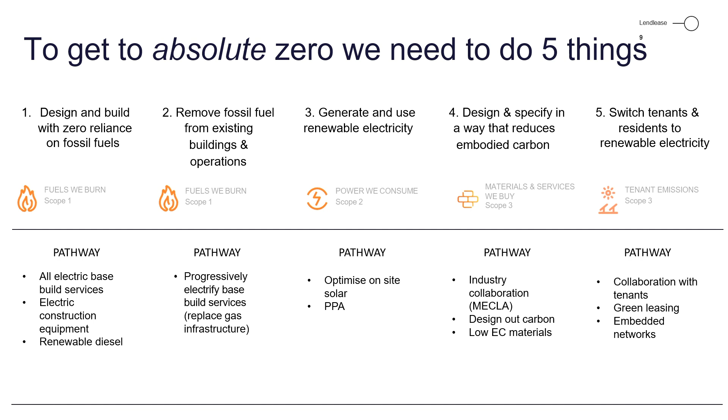Under that context, we have been looking at sort of 5 key things that we need to do to decarbonise in the context of the real estate business that we run. We've broken these up into scopes. The first 2 are around our scope 1 emissions, so think about the fuels that you burn - in the context of construction, that's fuels we burn actually on site, diggers, trucks, and so on, and then in a building, gas to heat the hot water and the cooling systems. So here we have to look for ways to design and build with zero reliance on fossil fuels. We've been experimenting with different types of electric kit.

We've been experimenting with fuel alternatives, things like renewable diesel, etc. And then the second item there is removing fossil fuel from existing buildings and operations.

So we have to go through all of our buildings that have got gas in them now and map a pathway to replace that gas with heat pumps and the like so that they can be fully electrified. And so that will apply for all our build-to-rent buildings, etc., now that we're building fully electric from day one.

So for the newer stuff coming in, we can set that pathway to decarbonisation much more easily, but we've also got to remember the existing stock, and that's a very relevant story generally in terms of circularity, because existing stock is something that we need to love and cuddle, as we'll get to later for number 4 if we're thinking circular.

Number 3 is actually the easiest on our Mission Zero journey, as we like to call it, which is the generation and use of renewable electricity. There are solutions out there. We're just about to enter a deal with a number of different PPAs in different states that will see us 100% renewably powered in the next financial year. So that one, I think, once you can figure out your data and what you need, is fairly clear.

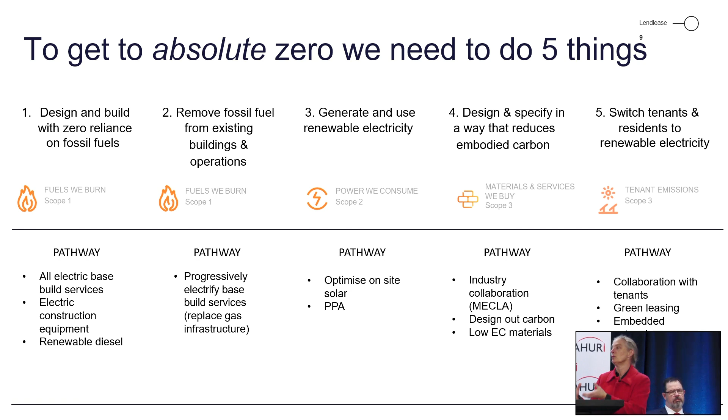And then downstream, when we've got people using our buildings, which at the moment are predominantly commercial tenants, but in the build-to-rent context will start to be residential tenants, then we need to be encouraging them to be using and purchasing renewable electricity and being as efficient as possible. So let's deep dive into this one in the context of circularity for you guys.

So I just thought it'd be useful to talk a little bit about why embodied carbon matters in the built form. There's been lots of conversation around the amount of electricity buildings consume, the amount of energy, the emissions associated with that. That's been a very large story, and it accounts for an enormous proportion of the world's emissions. So you might say, well, shouldn't we try and solve that first? Isn't efficiency and renewables the whole story? And it is a very big part of the story, but it's not the whole story.

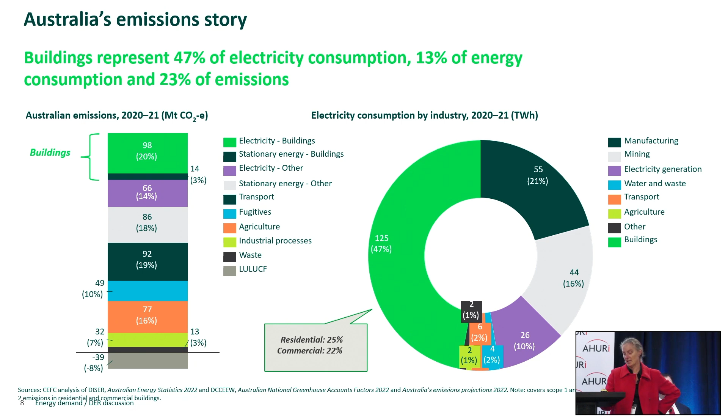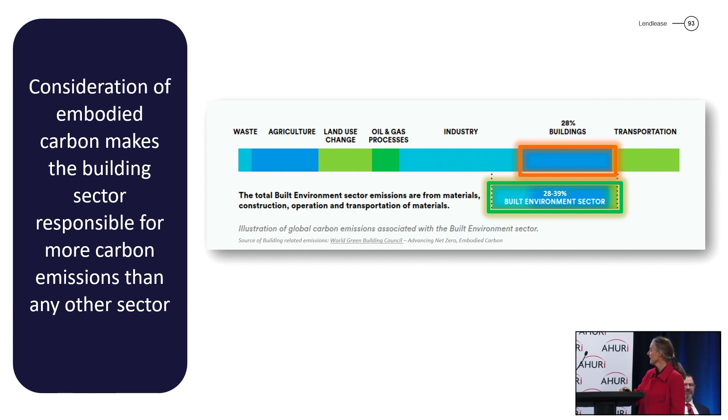All right, so in terms of the work that we do, let's give you a sense of the kinds of things we have to think about if we're going to lean into that embodied carbon space.

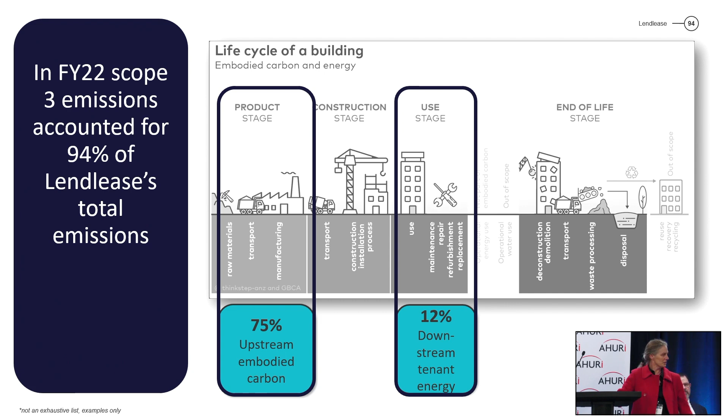For us, building is actually part of our Scope 1 because we are a builder. For other people, that may not be the case. And downstream, there we are in the usage phase. So that all looks very simple, like, hey, just change your materials. Well, let's have a little look at what they are.

We've been working heavily with an organisation called MECLA—we're one of the early founders of it, the Material Embodied Carbon Leaders Alliance—coming together with suppliers. Many of my friends from MECLA are here on the platform with me: suppliers, designers, consultants, clients, etc. Everybody coming together to work out how we can resolve this.

There are probably four key challenges we face when it comes to building materials and reducing their carbon footprint. The first is the most basic: the ask has been inconsistent. We've had certain government departments or agencies asking for reduction in embodied carbon and others not asking for anything, similarly in the private sector. From a supplier's perspective, that's mixed signals—is there any reason for them to retool, to innovate? Is this real or is this inconsistent? So with MECLA we've been trying to make sure everybody is asking for a reduction in embodied carbon all the time. If any of you are in the space of asking for housing, embodied carbon reduction should be core and central to your ask.

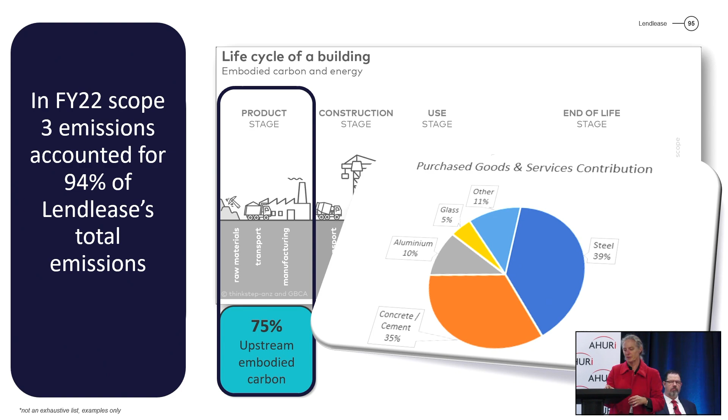So that's the materials front, but even more relevant for this context around circularity is the design space. Another opportunity to reduce embodied carbon is to look at the world of design. The first question for design is, do you need a new building at all, or can you repurpose an old one? You'll see why I say that when you look at some slides I've borrowed from friends at Atelier 10.

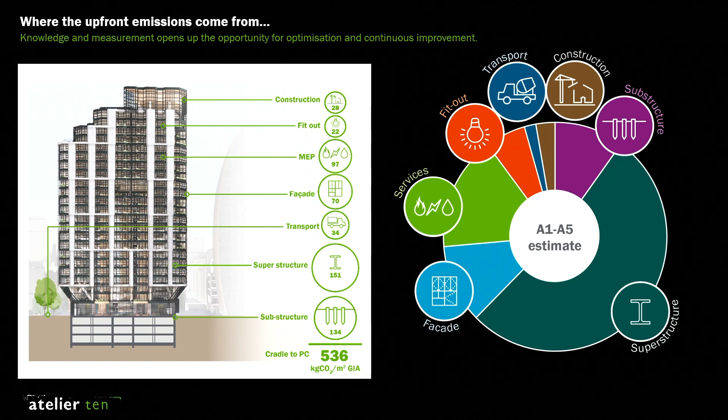They've given us a few clues on things we can do and avoid, and a lot of them are not that popular. If you look at the superstructure, the first dot point is a smaller grid—meaning a smaller column grid, i.e.

More columns—that might sound counterintuitive, but if you've got a big span, you've got to have some hulking transfer beam that sits on top of it. So there's actually less concrete overall if we've got more columns.

We've been on a journey in the last decade saying floors need to be big, expansive and open. But in the residential context, there's lots of opportunity to lean into more columns because there are lots of walls in homes and houses. This is probably more of a challenge in the commercial context.

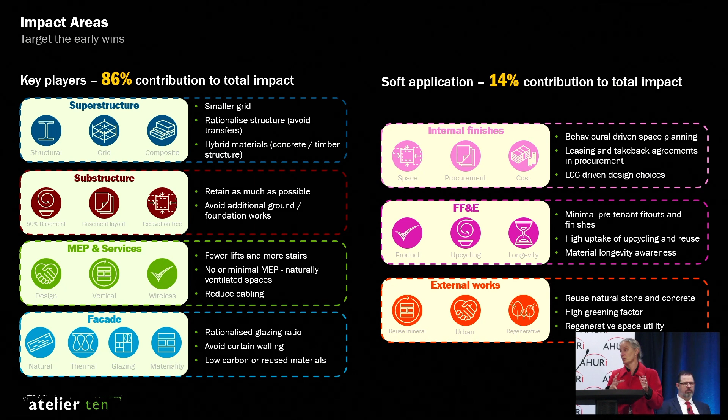There are other things too, like retaining as much as possible. If we can keep a structure and strip it out—there's lots of talk at the moment about repurposing commercial buildings that are underutilised or old, gas-powered, etc. Can you electrify them? Can you turn them into new commercial space or new housing, keeping the structure? That will go a huge way to reducing embodied carbon, and that's the ultimate in circularity, extending the life of a product.

Things like fewer lifts, more stairs, making your services simpler, etc. But I thought I'd pull out a few examples that I found particularly interesting when we started to look into this. So this is the column one.

The one on the bottom actually has a 20% saving in embodied carbon when you put in those small columns. They've shown a Frank Lloyd Wright version of columns to prove it can be sexy and have lots of columns in a space—that's in Wisconsin, which goes back to my architectural roots. I remember at uni salivating over things like that.

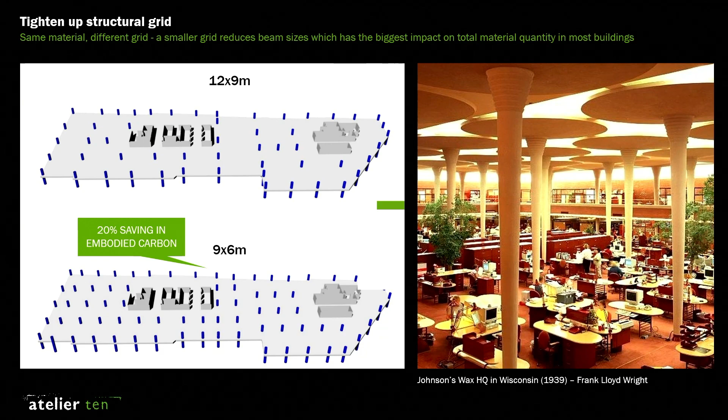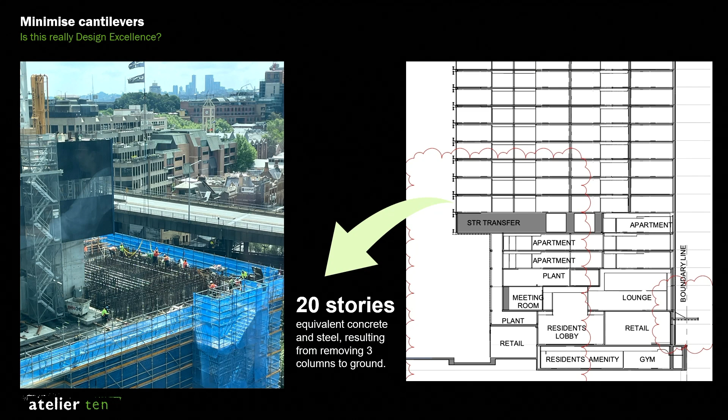Here's another example: a building in Sydney where the council was particularly keen on sight lines—they wanted to keep that space open, so they said, can you cantilever, can you hang out, similar to the Singapore thing. Where it says STR transfer, to achieve that cantilever they've had to put all the steel reinforcement in—as much steel and concrete as there would be in 20 floors, into one, just to hang that over.

When I studied architecture, cantilevers were in the good bucket—whoa, that's cool, that's great. We are going to have to relearn what's cool and what's great. That is ludicrous, and I reckon if we'd gone back to council at that point and said, do you realise what's required for those sight lines, perhaps a different decision might have been made. This is the challenge of our time: a lot of things we thought we knew, we're getting better at, we're learning and understanding, and we have to unlearn some of the habits we had in the past.

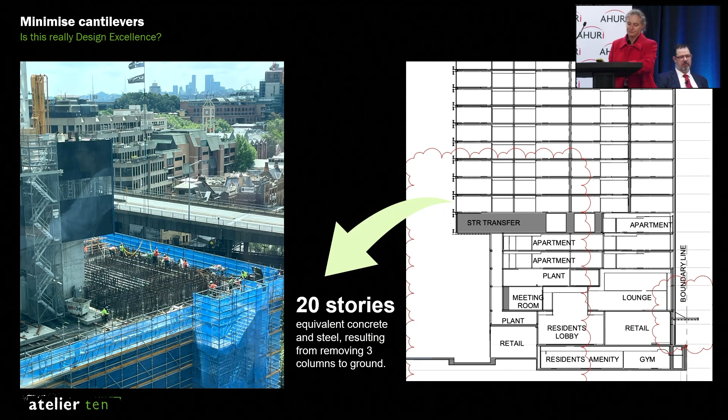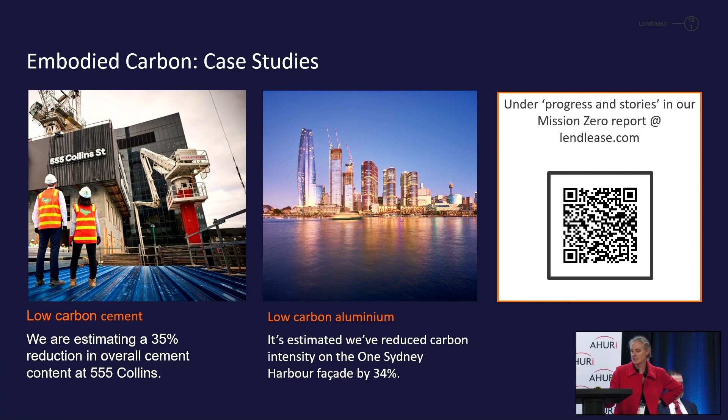If you want to learn about some of the things we've been doing, you can use the QR code—we've got a little report that talks to stories where we've made really good gains in things like cement and aluminium. There are advances, and most suppliers are really leaning into this. These are all the people on the MECLA table with us as well, so if you're not in that tent, I highly recommend it.

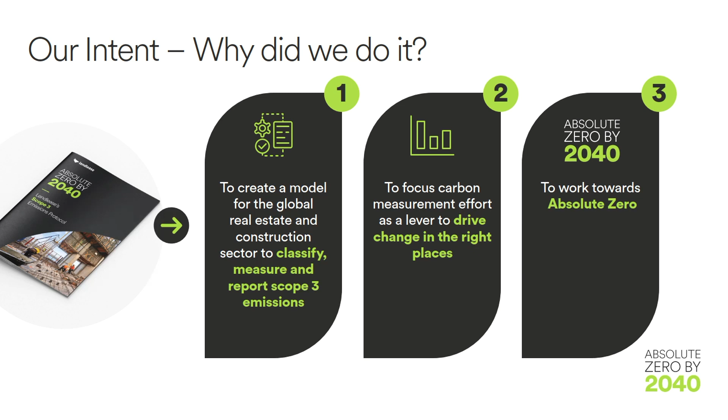Just the last thing I wanted to touch on—one of the other challenges we've had, as anyone who's played in this space knows, is that embodied carbon and scope 3 generally are very vague terms. In the greenhouse gas protocol they're not very well defined, deliberately, because everybody's scope 3 is a little different, so it has to be contextualised. We're worried about there being 20 different versions of defining this in the market, so we've dropped a little gift into the industry to start the conversation around having a more consistent way of considering embodied carbon in the context of our work.

We call it our Scope 3 protocol. We did this torturous process where some people in our team looked at 22 different company guidelines related to the greenhouse gas protocol, and we looked at 68 different disclosures, and then there are a bunch of subcategories. We went through and worked out which ones we think are relevant for our sector, and we've suggested here's what you could be and should be considering within your boundary.

And we have made that free. It's on our website. We want people to use it. We want people to tell us what they think is right or wrong about it so that we can collectively come to something that we can all use and establish. And so these are the sorts of things that we have to report underneath that. So there's a little bit of a start off to the conversation. Thank you.

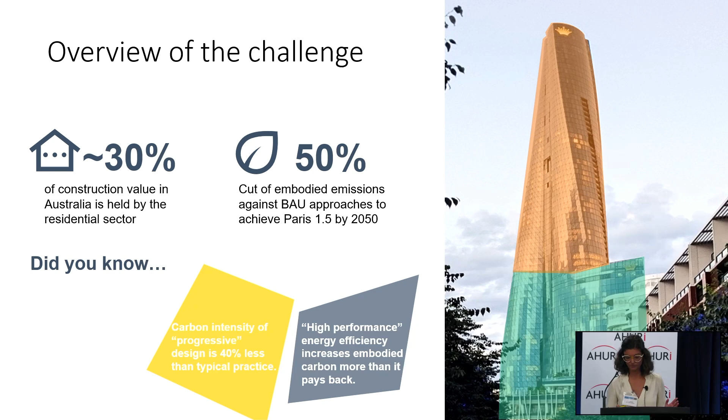All right, so if we follow the Paris Agreement, for every single project, master plan, or residential development that you have, we need to build the same things with the same specification, but by reducing embodied carbon emission by half. So it is a very big challenge.

So when we look at the upfront carbon emission for dwellings, the first chart, the one on the right—sorry, I'm not great with right and left—the smallest one, it is for Class 1A, so this would be for detached homes. And the chart is in kilograms of CO2 per NFA, so it is per area ratio.

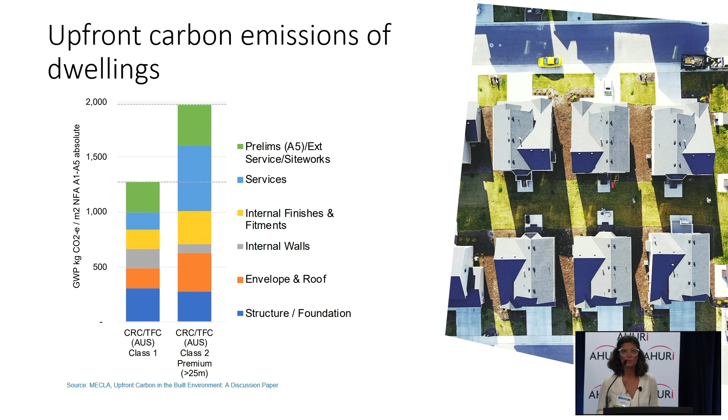So it is smaller for homes than for apartments, but we need to keep in mind the main reason is because there is a lot more foundation, underground car park, and so on in apartment buildings, and structural elements. But we need to be mindful as well that apartments tend to be a bit smaller than homes, so it does balance up the carbon emission between the two types of dwellings.

The specificity of homes is that there is a lot of stuff in a home. It's not like we deliver a cold shell apartment building or office building, where a lot of the emissions are in the structure and the facade. For homes, there is a wide diversity of emissions.

If you look at the envelope plus the structure, it's only 40%. Then all the stuff inside is another 35%. So it is important to start looking at homes. It's possible to start with the structure and facade because it's what people are most familiar with, and there's less material involved in terms of number of elements. But keep in mind there is also a lot of emission from what's inside, including the building services.

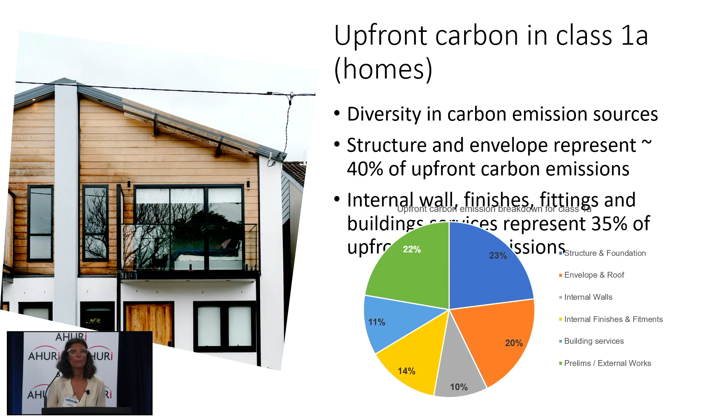It's a bit similar for apartments, but as we can see, the structure and facade is much bigger, and the internal walls will be a bit smaller.

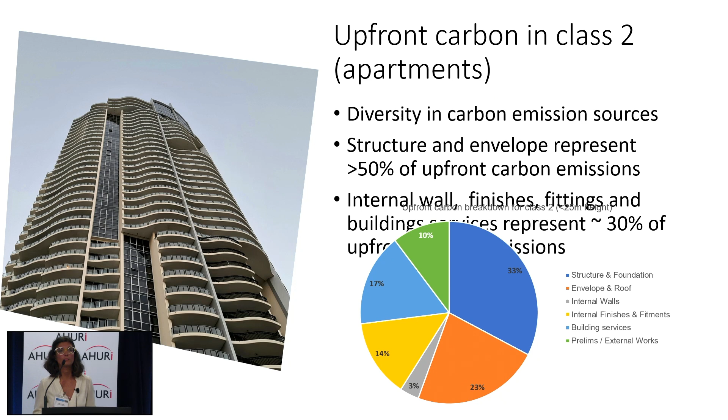So I did some rough estimation based on the footprint benchmark for homes and apartments, and given that we have about 200,000 new dwellings built each year, that comes up to about 28 million tons of CO2 per year just for upfront embodied carbon in residential. To put it into perspective, that's about 6.5 million cars driven per year, 4 million homes' energy use for one year, and also 1 billion in ACCUs. So it would be very expensive to offset.

I tried to look at how big the forest would need to be as well, but I got a bit into a rabbit hole.

Just to highlight as well, on townhomes, for example, the upfront embodied carbon is 25% of carbon emissions across the life cycle of the home. And as homes become more energy efficient, and more importantly, as the grid decarbonizes, this portion is becoming bigger and bigger, and it will become bigger quickly. So it's a very meaningful and topical element that needs to be addressed alongside other building typologies.

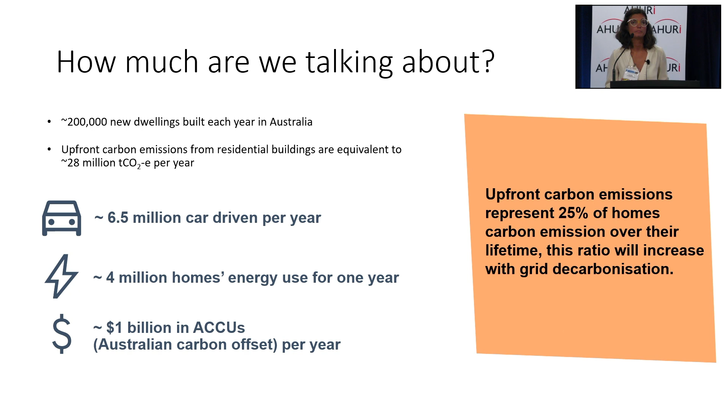So why are we not doing more about it at the moment? What are the challenges that the industry is facing?

The first one is measuring. There are different reasons why measuring can be challenging. This is a chart that was produced by MECLA. There are different benchmarks that exist, and each of them has a slightly different coverage and metrics that they use, which make them really hard to compare.

It doesn't need to stop you from measuring embodied carbon. I think what's important is that you start with a methodology and clearly acknowledge what is included, what isn't, and the level of coverage. Then you can either choose to add more over time or just make sure that whatever you're comparing with remains consistent.

The second one is that in the residential sector, especially for homes and low-density dwellings, there may not be a lot of data available to do a life cycle assessment and measure embodied carbon. A bill of quantity or a cost plan may not be as detailed or available, and that will definitely create some challenges to measure embodied carbon, but also to assess any reductions that a project wants to do in terms of circular economy or other initiatives.

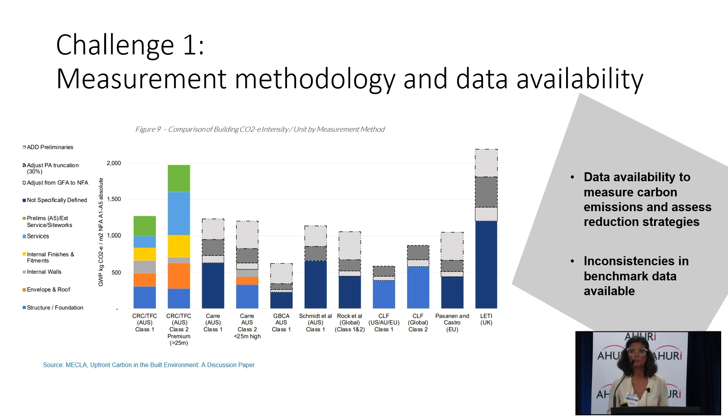That shouldn't stop you either. But I think it's important to acknowledge it and be able to extract information from what is available. It's possible to extract quantities, for example, from drawings or things like that. The next one, and George touched on it this morning as well, Rohit touched on it this morning as well,

is that residential buildings are a bit missed from a lot of the frameworks that already exist around sustainability, circularity, and embodied carbon. For example, Green Building Council Australia, which has been really leading sustainability for buildings in this country, would cover apartments with Green Star building, but it's not widely used for apartments.

And for homes, the Green Star Home scheme doesn't include embodied carbon at the moment. There might be some changes with Green Star Communities coming up and incorporating it, but similarly, it's not widely used and it's only on master plan projects.

NABERS embodied carbon, which is going to be an amazing tool used by planners as well to drive the measurement and reduction of embodied carbon on other types of asset classes, will not cover residential. And then recently, BASIX in New South Wales with the new SEPP has released a material index. So this is the first one that is really starting to address embodied carbon.

It only looks at a portion of the building elements, including the envelope and structure, but it's a bit limited in the interior elements. Still, it's a really good way to start measuring and collecting data, and also to educate people in the industry on embodied carbon. So I'm hoping other states will follow up as well.

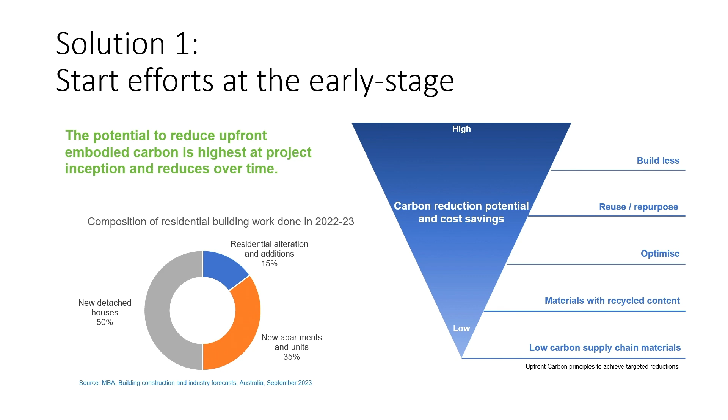So what can we do about it? The first thing, highlighted before, is that it's critical to look at this at an early stage, even if there's a limitation in the data available at the time. It's about planning how we can build less in the first place, how we can better use or repurpose existing buildings or refurbishment, or how we can make better use of existing space. That can only be done very early on.

If you arrive at the end of the project and it's just about switching normal Portland cement concrete for green concrete, you wouldn't be able to achieve as much reduction. Keep in mind we need to achieve 40% by 2030, and we're already in 2024. So given the scale of the challenge, we really need to start looking at it at an early stage.

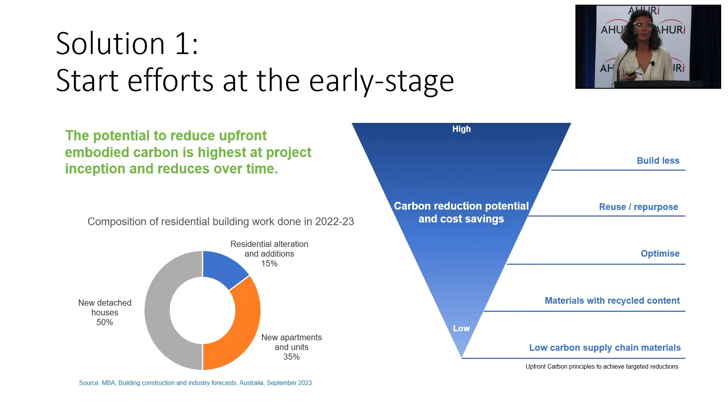Next is following the circular economy hierarchy and using some of the strategies already mentioned, such as building smaller homes. It's probably not the most popular option, but it's very efficient, and it also reduces the cost of construction.

Providing flexibility in the space to allow for upsizing or downsizing, making it easier for people to downsize when they don't need such a big home. Also refurbishment of existing dwellings -- since the envelope and structure account for about 50%, you can easily save 50% by doing a refurbishment.

Reuse of existing material, creating shared space -- this is more common in apartments, although it's been lost a bit. Can we have shared space to cater for when we invite people over, so we don't need such a big apartment? Can we have a shared garden? Can we have a shared laundry? That one's a bit more tricky, but do we all need a laundry room?

And finally, we can also look at material passports. It would be quite cool if we could get a digital version of our home with a drawing, that would tell us what's been used for the tile in my kitchen, so if I have a crack, I can actually replace it instead of redoing the whole thing. Same for the paint -- always good to know which color you have. That would also give you a stronger sense of ownership, because you actually know what you own.

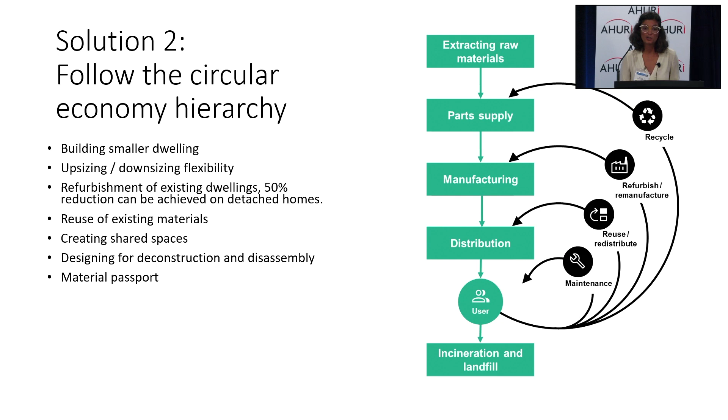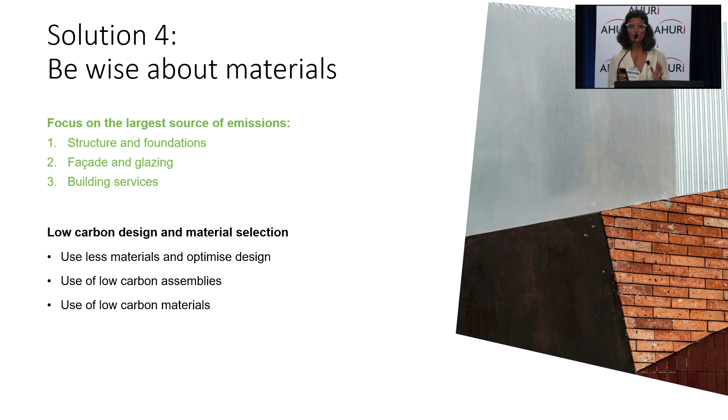And finally, the last step, which is the one most commonly addressed at the moment, is changing materials. So looking at the biggest sources of emissions -- structure, foundation, facade glazing, building services -- and looking at how we can, through efficient design, use less, use low carbon assemblies, changing the type of buildup we have, or use low carbon materials.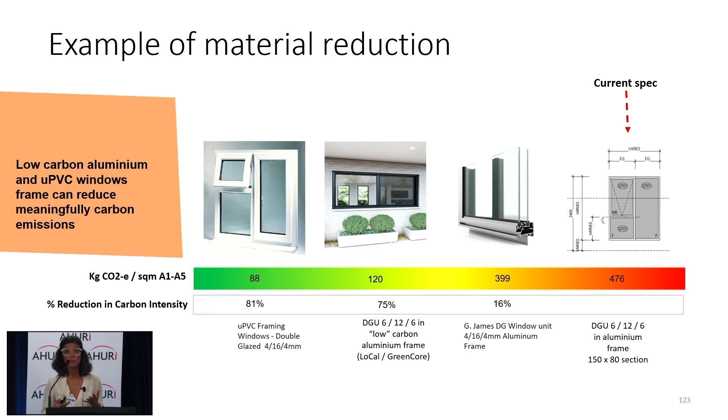So just to summarize, the upfront carbon in the residential sector is very large, and it will grow over time as a proportion of residential sector carbon emissions overall. The opportunities to support the industry exist via education and creating frameworks and regulation, because there's currently little incentive to reduce upfront carbon.

It's not always more expensive. If you do it from the beginning, you can even save costs by reducing carbon emissions, because by definition you're going to use less material and resources. Circular economy will definitely help, especially when we have such a high target and such a short timeline.

And finally, it's important to note that there are also a lot of co-benefits. For example, shared space delivers social value and connection between neighbors. It could reduce cost, and it could support the development of innovation. Thank you.

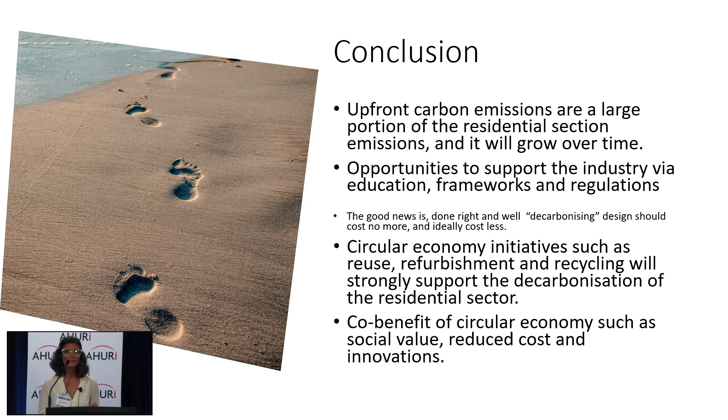Thank you, Julia. I'm going to keep us moving now because we're a little behind time, but I'll now turn to Cathy Inglis to drill down into the building materials at a very practical level. What are we talking about, Cathy?

Thank you. So I'll get a bit more specific about the actual materials and what we're going to build with. We heard this morning about the cost impact on building materials and how that hit the market. Specifically, I'm from the brick, concrete, masonry, roof tile industry, so I will focus on that part of it.

A lot of the discussion on embodied carbon in buildings focuses around the big elements and the big carbon contributors, which is concrete, steel, aluminium, and glass. The other materials are all a lot lower in comparison, and that's often because of their contribution to the amount of materials in the building as well.

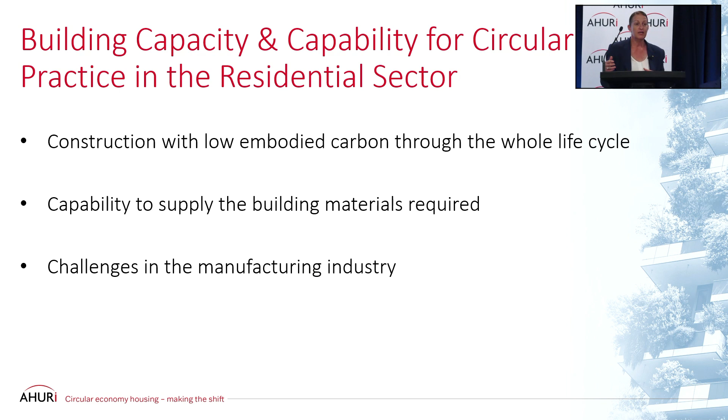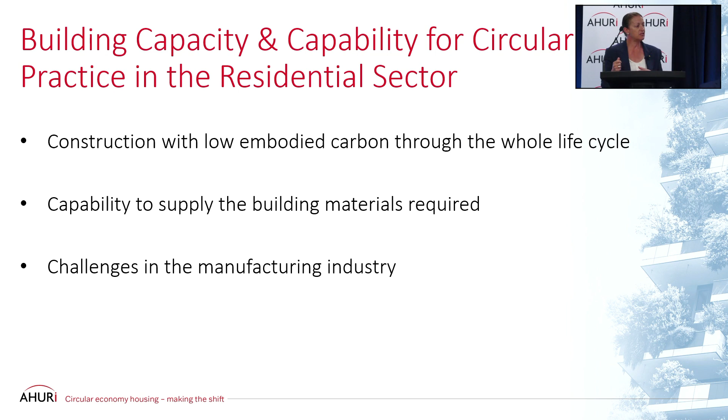So looking at how there's low embodied carbon, but through the whole building cycle, the capacity of the building materials that we need and the capability to supply them, and what challenges this means for the manufacturing industry in Australia.

So the building life cycle, we saw this in Anne's before, but when we talk about actually making the materials, we're down in that A1 to A3 portion right at the front in the product stage, and that's the contribution. So a manufacturer's embodied carbon that comes into that A1 to A3 becomes someone like Anne's Scope 3 emissions.

So manufacturers try to get our Scope 1 and 2 down so that that's other people's lower Scope 3 emissions during the construction phase and through the life of the building.

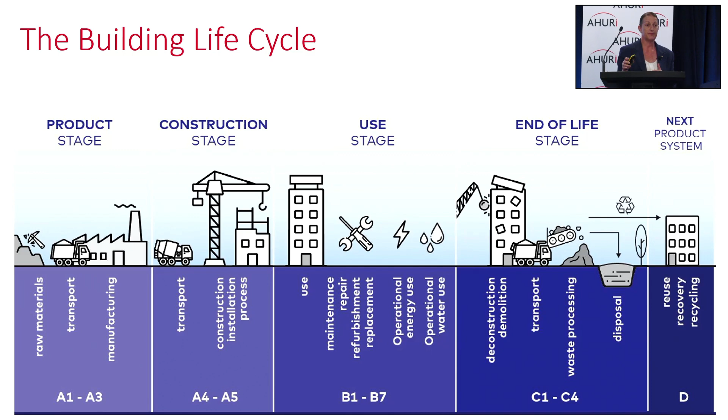So the life cycle embodied carbon is really important, and I know we're starting to measure with BASIX the upfront embodied carbon in buildings. NABERS is bringing it in before the end of the year.

And that's a good starting point, but we do need to look at over the whole life cycle, because looking at just the upfront part is a portion of it, and you don't want to have a perverse outcome by building buildings that have lower carbon but have a shorter life cycle because they don't last as long, they're not as durable, they're not as resilient.

And this morning it was said, if we can make buildings last twice as long, we save that 45% carbon. So we need to consider the durability and resilience of materials and their life.

And you've got embodied carbon in that upfront build, but you've also got embodied carbon in the use stage, which is your maintenance of those materials, and then you've obviously got embodied carbon at end of life. Then on top of that, you've got your operational carbon as well.

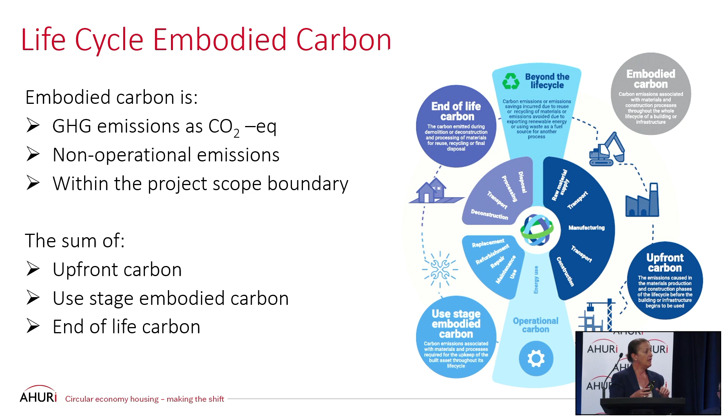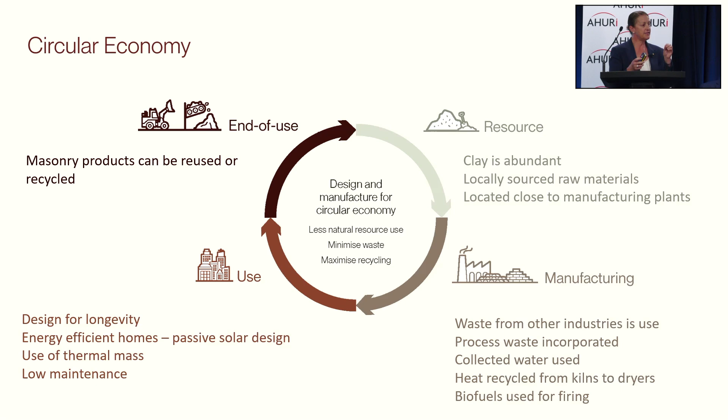So if we look at this in the circular economy story, when you look at that from a manufacturing point of view, you have your resource, you have your manufacturing, your use stage and your end of use. Now I'm going to go through each of these in example and just look specifically about how bricks and masonry fit into this circular part of the economy.

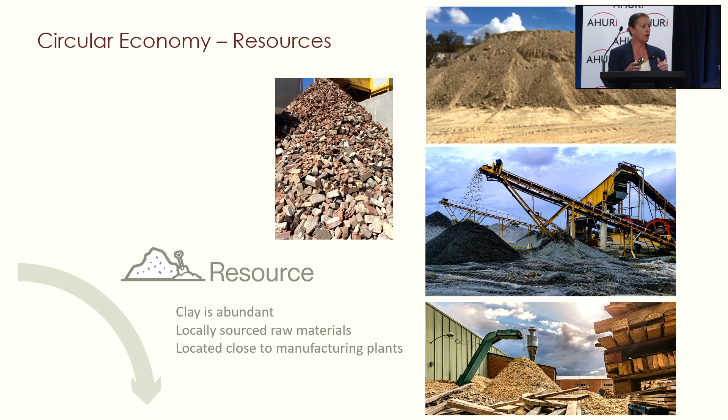So as a resource, clay is one of the most abundant materials in the world. It's sourced locally, it's not transported a long way. All the factories in Australia are local and they're located on clay quarries, so there's not a lot of transported materials.

Through the manufacturing phase, there's a lot of other waste materials that can go into making bricks. Everyone would be surprised - we can put a lot of stuff into bricks. But one of the biggest impediments of us doing that and introducing circular economy, so reducing other people's waste and diverting it from landfill, is the EPA. And I'm very critical of the EPA on many levels because they're actually preventing manufacturers from decarbonising. I'm having lots of discussions with them about that.

But within the process in manufacturing, in the plants, any waste that's generated is incorporated straight back in. Any crushed bricks and crushed materials can go into the bricks, and that's all fine because that's all collected on site.

Because manufacturers have manufacturing licences, we don't have waste licences. So you're not allowed to accept someone else's waste unless you go through years and years of arguments with the EPA to be able to bring someone else's waste onto your site.

There's many things that you can add, and various plants around the country have little bits happening. We've got coal washings going into bricks, shredded timber and waste pallets. There's a research project in Sydney looking to use organic waste and repurpose it into brick manufacture next door, because the tip is located next to the brick manufacturing plant. It's been going on for 2 years, and we still have not got permission from the EPA to do a trial for one day in a plant.

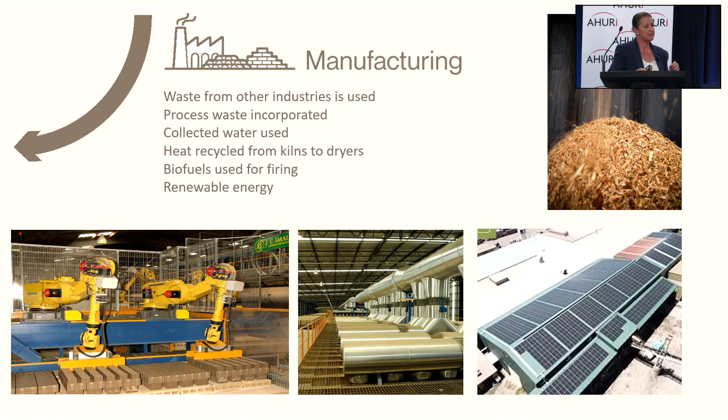When we look through the use stage, design is one of the main things in how you reduce the carbon and improve the circularity. You design for longevity. Even though the grid's decarbonising, we still need to look at the energy used over the operating life of those homes and build energy efficient homes. Design for resilience and design for low maintenance.

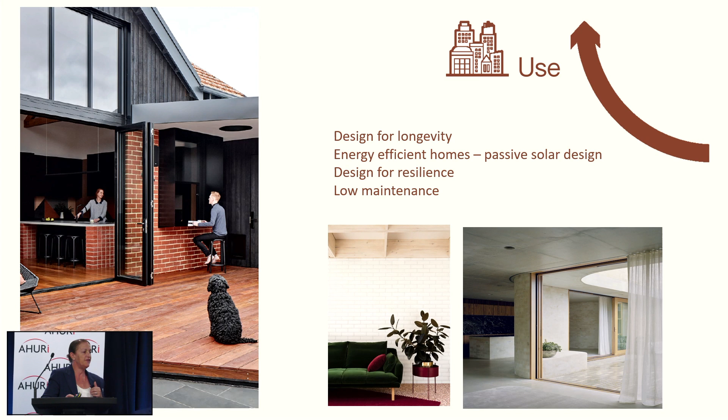Through those phases, there's a lot of research going on in the industry at the moment to look at thermal performance of houses, designing houses for future climate scenarios, and looking at the climate in 20, 30, 40 years' time. We're building houses now, we want them to last longer. They're going to be here in 40 or 50 years, so we need to design them for what's happening in the future as well.

Finally, at end of use stage, bricks, masonry, roof tiles have a good story. Bricks are one of the few materials you can actually reuse with their full structural properties intact. There's lots of great examples - when you reuse them, that's your upcycling. We pull them down, clean them off, and reuse them.

There's about 5 brick recycling yards in Sydney. The oldest one is the Brick Pit, which has been going since 1975, and since then they've recycled 60 million bricks. The average house has about 8,000 to 9,000 bricks, depending on the size, so that's an awful lot of bricks recycled.

But the other thing is, when do you do it? At what point of that building's life? I've got a research project going at the moment because the old bricks are much easier to recycle with the lime mortars on them - they're easy to clean off. The newer bricks, once cement came into use and we learned we needed more durable mortars to cope with coastal and weather conditions, are harder to remove.

We're working on a project combined with RMIT and Newcastle Uni called Not So Sticky Mortar, trying to work out how we can get mortar off bricks easier so they can be repurposed even though they're built with cement mortars. So there's a lot of research happening in the industry to improve this circularity of products in the market, and most industries are doing the same thing. I think this is an opportunity for the industry to lean into manufacturing in Australia, to grow this part of the market more, and use products that last a long time, are durable, and can actually be reused at the end of their life.

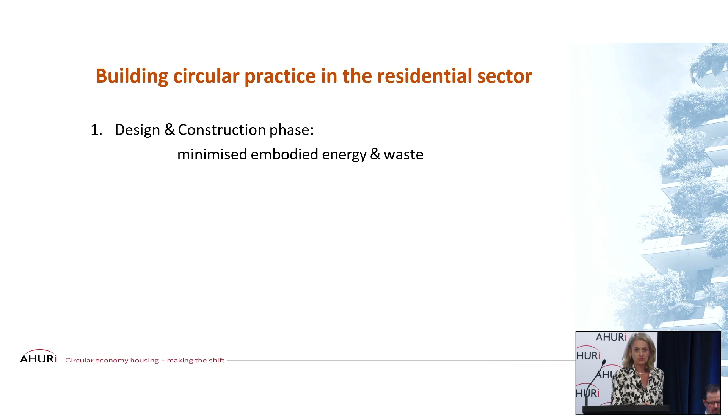I'd like to present circular economy hubs to you. So we started out, and we've been talking through this wonderful session about the design and construction phase and the embodied carbon. We've talked about the operating phase and how we will try to get gas out of our buildings. Victoria has gotten all the gas out of all new build and refurb, so we'll be cooking without gas, induction, pretty soon. And I'd like to talk, as Michael mentioned, about the habitation phase, what I'm calling the habitation phase, behavioral circular economy, how people live in the buildings.

So we've talked about the stuff in the buildings. I'd like to talk about how the upfront design and inclusion of circularity can encourage behavior change in the 40, 50, and onwards, hopefully, years that people will be in the housing and reduce their waste and emissions.

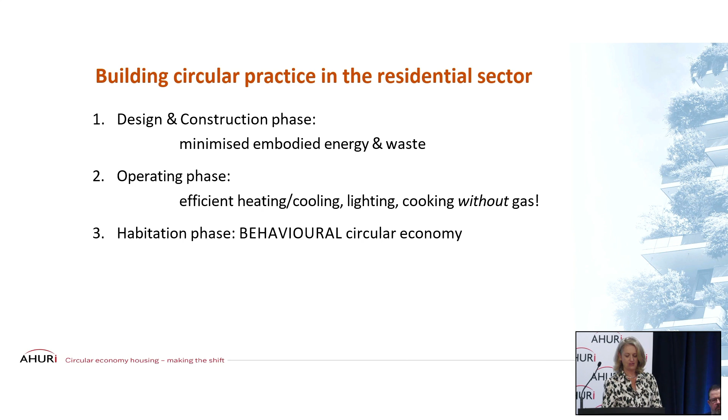So this session is about building capability and capacity in residential housing. This is to build the capacity of the future people who will live in the housing. And so we will do this through circular economy hubs.

My thesis is, like in the broader circular economy, that this clever design at the front of an apartment block or a subdivision can reduce waste and emissions later on, saving the residents unnecessary vehicle trips or buying stuff that's been shipped to Australia they don't need to be buying, and also building community at the same time.

So this means setting aside some space in the design phase for this to occur, and I'll show you exactly what this means.

So hubs, I might refer back to Lisa, our first speaker today, who talked about the ministerial advisory committee that she's on and their interim report. The chair, John Thwaite, said in that report, the circular economy is essential to reaching net zero, with 70% of our carbon emissions associated with the way we make and use things.

So there's the house, but what about the things inside? Ralph talked about doubling the life of housing. What about doubling the life of the stuff that you buy and not buying more stuff? Sharing the things, extending their lives to keep them in use.

So first I'll show you an example, some good photos of a hub in action. I'll show you what recent Australian work is here in New South Wales. And then finally I'll link this concept to social and affordable housing, my passion. A win-win for reducing cost for residents.

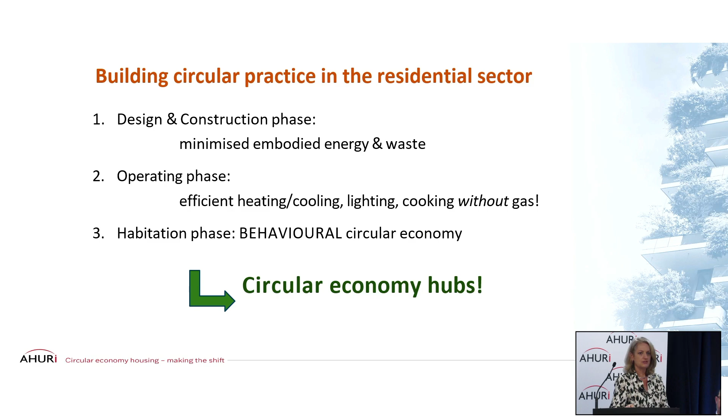So this is me walking around Copenhagen a few years ago, and I was walking in a new build area, Nordhavn, which is North Harbour, with a lot of mid high-rise apartment buildings, and I saw this. What is a Genbrugsstation? Any Danish speakers here? No. Google Translate: it is recycling station.

And then there was a little sign on it, and I was like, what? This is open to the community. I can walk right into this. So community linkages. The sign translates to: you can leave things here that you don't use anymore in exchange for others to enjoy, even outside of opening hours. Sincerely, the reuse advisor. That's what that sign in Danish says.

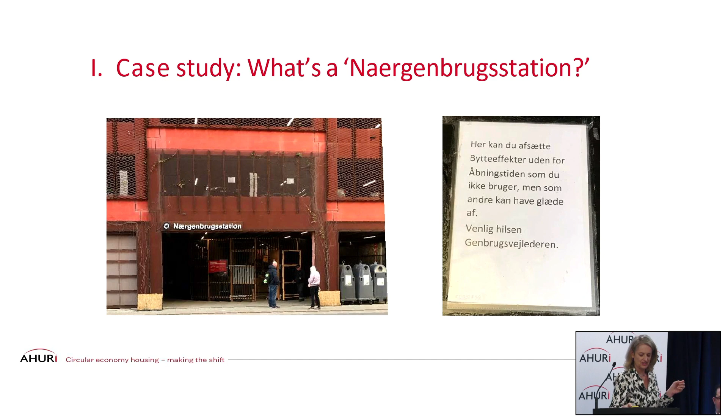So I was intrigued, I walked right in, and this is what I found. This is taking up the space of about 10 to 12 parking spots. So you give up that amenity for this amenity. This is a recycling station around the outside for hard to recycle items.

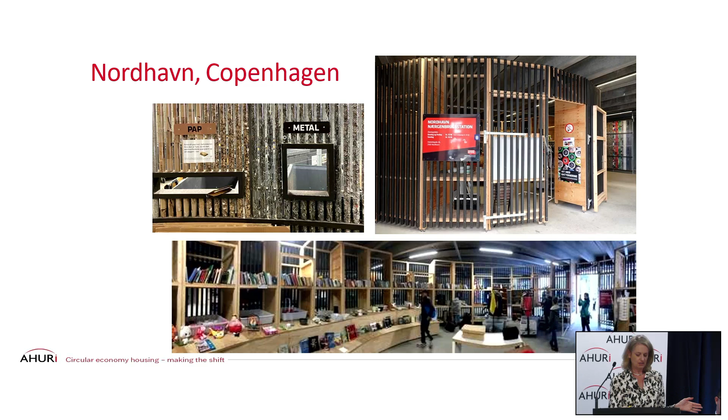And then on the inside, I went further, and we found a swap shelf. So this is for everyone, not just who lives in that apartment building, but the entire community can leave things for others. No exchange of money. You can just leave things there, take things.

I found out later in doing some research, this is flexible space for classes in repair. Things can be left that need modest repairs to keep them in life and keep them in use and keep them in circulation. And all of the shelving you see is on wheels, that could be wheeled outside. So not only is this open to the entire community, it is flexible and porous.

So here's the vision for you to take from this example. And I hate that we always look at overseas examples.

I apologize, but I was just walking by.

So what if it was a condition of development assessment for your multifamily building or your subdivision that you had to set aside some space for circular economy behaviors? Space out of the rain. Council cleanup enables poor choices and poor stewardship of things we buy. It's got to be out of the rain, dignified, with a light touch curation like this.

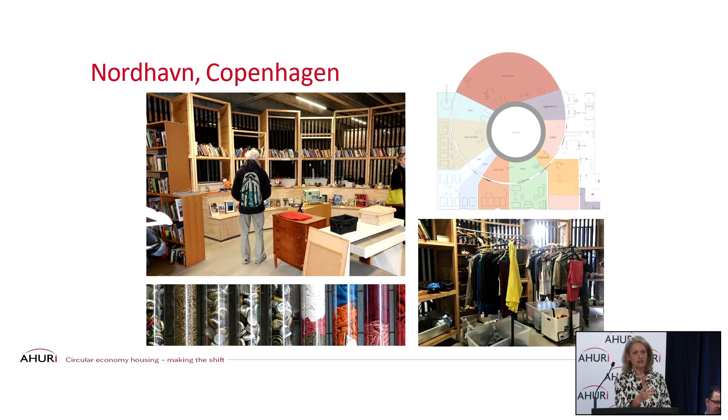So let's move to what's happening here in Australia. I have a few take-home things for you to read over the weekend. There's a few QR codes coming up.

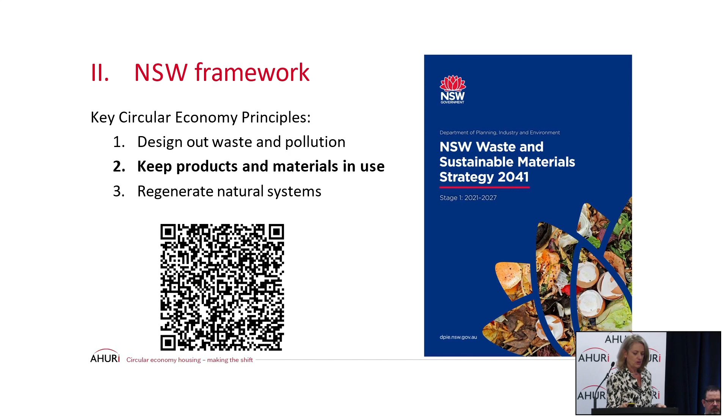We had a wonderful Too Good to Waste circular economy policy published in 2019. This was a follow-up policy in 2021, the New South Wales Waste and Sustainable Materials Strategy. The second core circular economy principle I'm talking about is keep products and materials in use. So that was 2019, this is 2021.

Lisa mentioned this morning the Circular Economy Community Hubs work that was published in 2022. New South Wales Circular was Lisa's previous organization, funded out of the Office of the Chief Scientist, New South Wales. She has now converted this into Circular Australia. She mentioned this very briefly this morning.

I served on an advisory group to the development of this work through 2021. This was developed with UTS's Design Innovation Research Center and Good for the Hood as advisory, but it's really Lisa's Circular Australia publication. There was a lot of case studies collected there, and a lot of incorporation of Indigenous wisdom through that working group. I was really pleased to be involved.

So the call to action from this work is this: community hubs are essential to providing citizens with the services they need to waste less. We don't know how to do this. We need facilitation. We need to know how to keep resources in use, how to regenerate nature. Community hubs are global best practice to engage citizens with the circular economy.

This is after the house is built and we're all living in it. There are many types of hubs with similar characteristics, but they need to be locally driven and reflect the local economy. I know you've scanned the QR code, and these are some concepts for the hubs - there's a lot of variety and options, from mobile hubs to kit of parts, basically for how circular economy hubs and behaviors can be normalized in our communities.

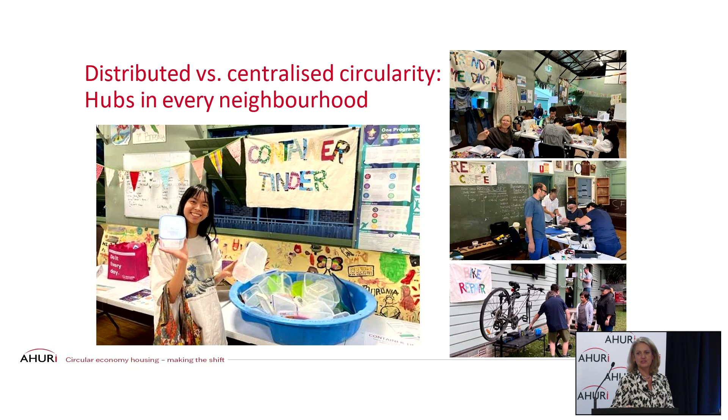I just have to emphasize, we do this in the local scout hall. I have to pack it up, and when we set it up, my colleagues and I, we set it up again every time. So this is why I'm promoting setting aside space during the design phase for this behavioral circular economy.

I'd like to talk about my passion, which is linking this to social and affordable housing communities. In one sense, to future-proof them, but also to link them better into the broader communities. I want broader communities to see social and affordable housing communities as resources, as clever people who can solve your too-hard basket. John Thwaites, chair of the Circular Economy Ministerial Group, said the circular economy is a market opportunity with potential to create new jobs and economic growth for Australia.

Not all affordable, many are. But I'd really encourage everyone in this room who is engaged in that project to think about incorporating these hub concepts, some space where this can flourish.

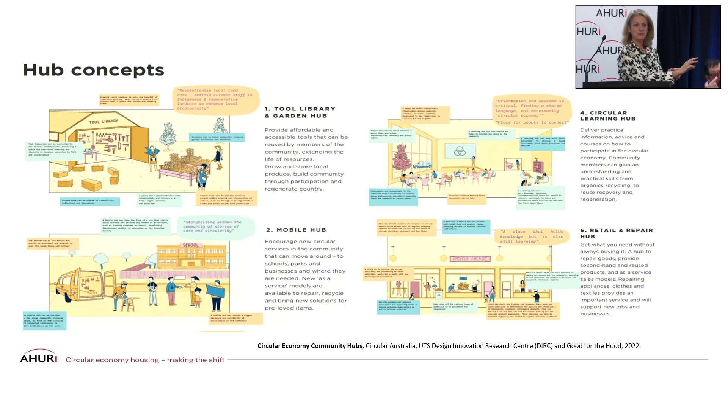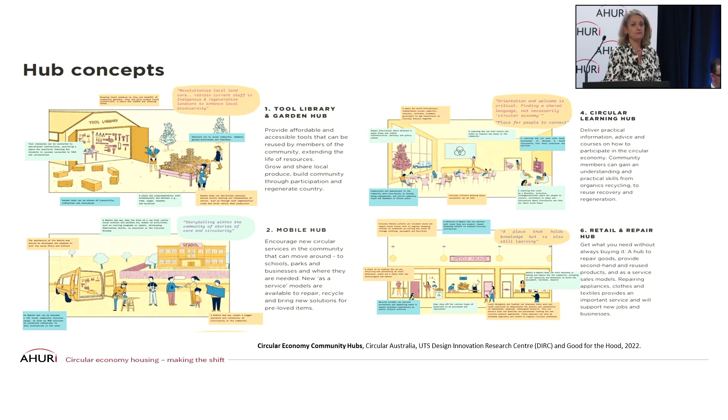I also got to go to a conference when I was in Europe, and I wandered into the Danish example of a peak body called RREUSE - Reuse Recycling European Union Social Enterprises. The obligatory address by the minister at the beginning was not the environment minister, as you'd expect. It was the employment minister. So we can expose ourselves to greater funding by understanding the connections to employment and training from the reuse and repair that the circular economy, and what can happen at these hubs, might represent for some of our customers, our colleagues, and our neighbors who live in social and community housing.

And then the $175 million Social Housing Energy Performance Initiative, SHEPI. It's always got to have a great initiative. The EPA is funding circular economy councils workshops - if there's any LGAs interested, that's in early June. A waste guide for councils and housing providers is coming out of the EPA. And the National Framework for Disclosure of Residential Energy Efficiency Information.

That's what we need, the star rating for the homes. Maybe if you couldn't get your negative gearing unless you rated a certain level - I didn't say that. I totally said that. You know, if you're not able to get your negative gearing unless you meet a certain standard.